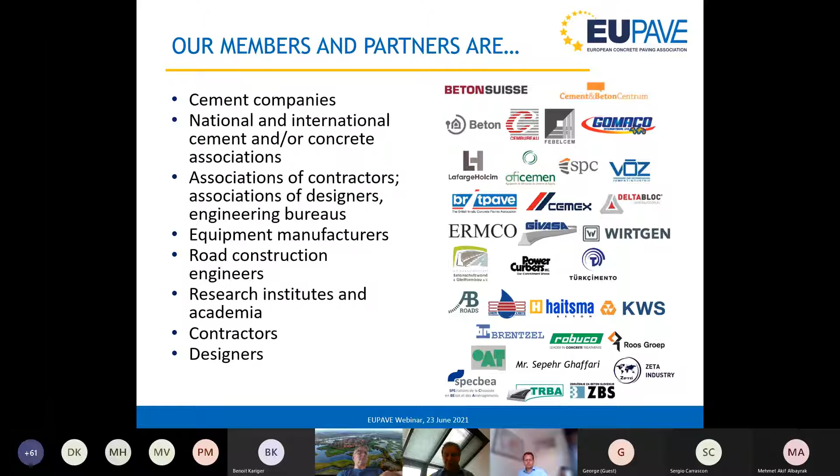We have full members and associate members, and partners, ranging from large cement holdings, international and national cement and concrete associations, to equipment manufacturers and contractors, and even small businesses, designers, and consultants. So all ranges of companies are represented in EUPAVE.

The work we do is summarized here by showing our 6 working groups: best practices working group for exchange of know-how, environmental strategy to talk about the environmental benefits of concrete, the advocacy working group mostly at the EU level, concrete safety barriers, and statistics and communication tools.

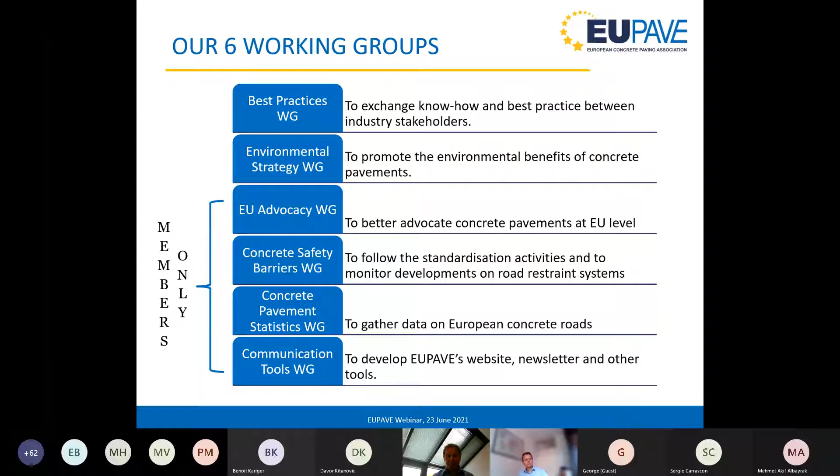Everyone who is interested in supporting the concrete pavement sector, or in getting support to help develop and build concrete pavements, is always welcome to join us as a member or a partner.

Let's come now to the agenda of today. We have a webinar with the title Towards a Low Carbon and Circular Concrete.

It was an initiative of our working group on best practices. However, it is very closely related also to our working groups of environmental strategy and advocacy, because the themes we will be discussing are really the themes of the European Green Deal. First of all, the CO2 reduction or carbon neutrality.

As most of you know, all national cement associations and international cement holdings are developing pathways to 2030 and 2050 carbon neutrality. So it is a very topical theme now. But also the circular economy, the use of recycled aggregates and other recycled materials, is also very important. Circularity is also part of the Green Deal.

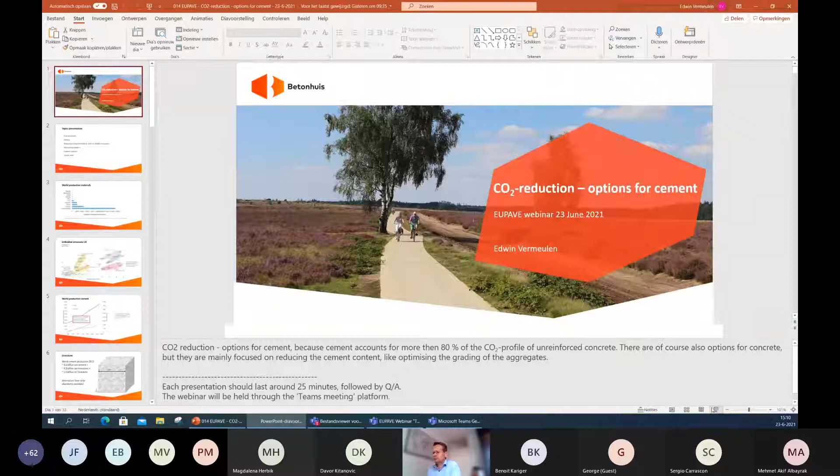I'm going to talk about options for cement for CO2 reduction, because cement is responsible for 80%, or over 80%, of the CO2 profile of unreinforced concrete. And of course, if we want to reach net zero carbon in 2050, we also need to address concrete itself, and of course the design of buildings, etc. But cement plays a very important part in this.

I'm going to try to explain why it's so difficult to find alternatives for Portland cement clinker, which is the main component of cement. But to do this, I have to start with the raw materials and a bit of history of the development of Portland cement clinker. I think that's really necessary to understand the research on alternative binders.

And in the second part, I will discuss alternatives, but also carbon capture and what we can do now to reduce the CO2 profile in the short term.

Here you see the world production of materials. The largest amount is cementitious material, which is mainly concrete, but also mortar and plaster. Compared to other materials, it's really a lot. We produce more concrete than all other materials combined. So if we are going to look at alternatives for cement or concrete, we have to keep this in mind. We need really a lot of material.

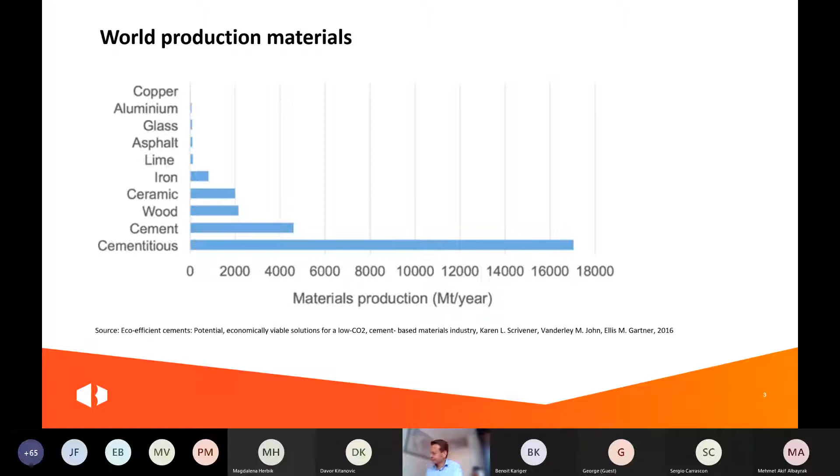We always heard that concrete is responsible for 7 or 8% of the man-made CO2 emissions worldwide. But that is clearly not due to the CO2 profile of concrete, but it has all to do with this enormous volume of concrete we produce.

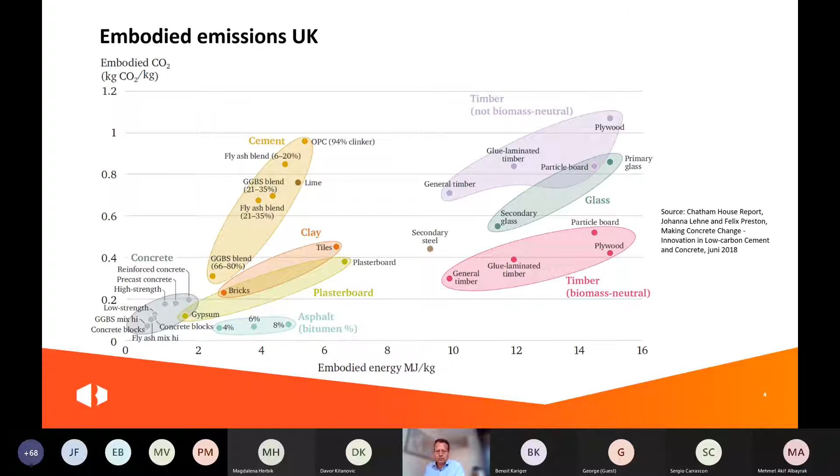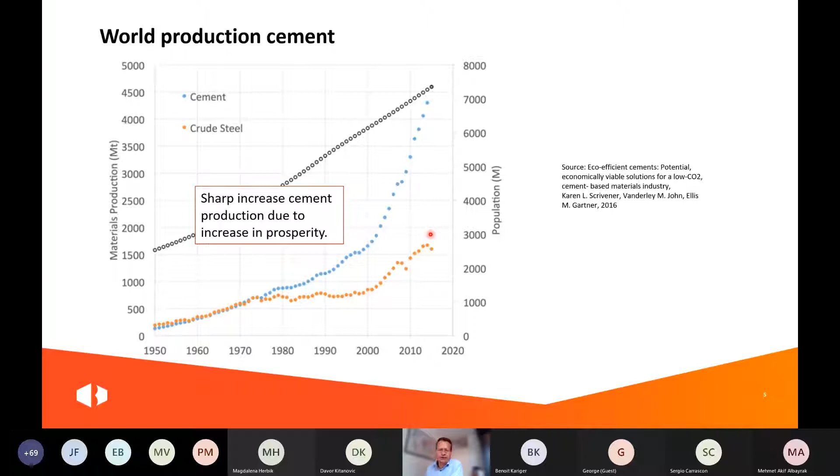And here you see the increase in cement, which started around 1975 to increase strongly, and especially after 2000. That was mainly in China, but also in other countries, due to the increase in prosperity. Once a society develops, people want to shift from wooden to concrete buildings, and need infrastructure, sewers, and things like that. So that explains the strong increase in demand for concrete.

So if we search for alternatives for cement, it's clear we need a lot of alternative material as well. And for concrete, we need 6 times as much as this for the aggregates. So alternatives have to be abundantly available to consider them.

Now, of course, we cannot use critical raw materials. Critical raw materials are not necessarily scarce, but if they're not scarce, they're only available in a few countries. This was actually the main reason behind the circularity movement in Europe. In Europe, we noticed that we were, for a lot of materials, dependent on countries like China. And that was the main reason to start focusing on recycling of those critical materials.

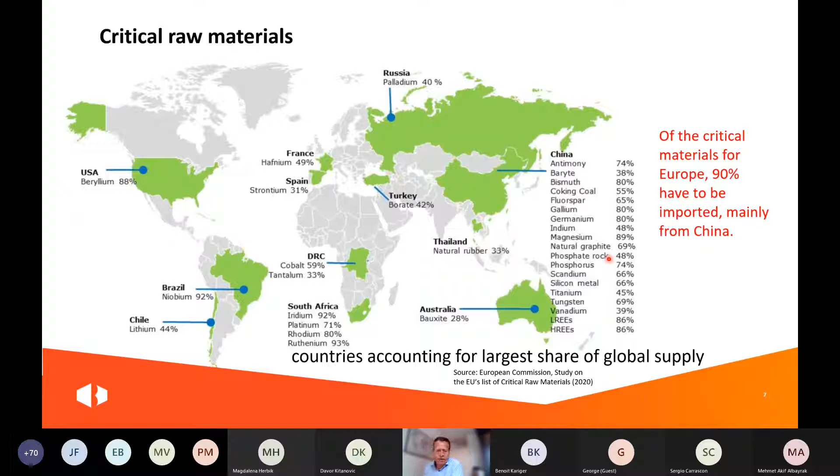Also for iron, iron is moderately scarce, 300 years available. But we need iron for cement production. Here we use clay. We need iron only in a very small amount, and it's sufficiently available normally in regular clay. And that's also the case for aluminium. We also need aluminium, but in small quantities available in clay. And clay itself is also, like limestone, abundantly available.

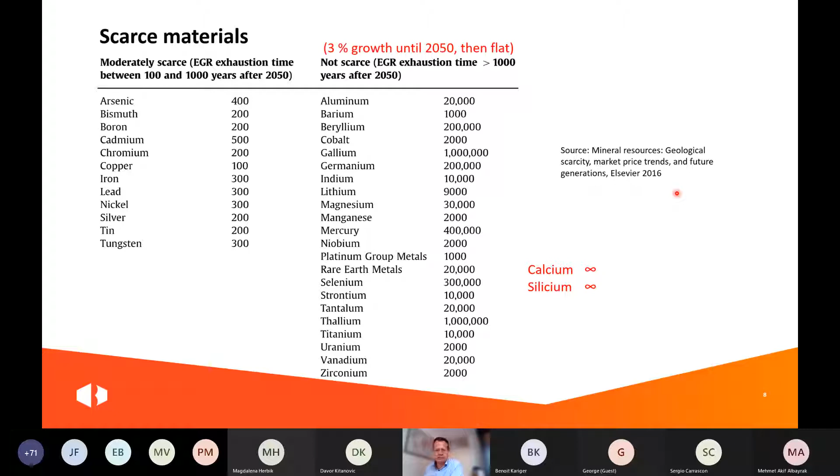Raw materials for cement are unlimited and regionally available. Interestingly, limestone is produced every year in larger quantities than we use for cement production. Limestone is basically skeletons of plankton, and in the oceans about 5 billion tons are produced every year, which is more than we need for limestone production. Of course, we cannot use this in LCAs because it is on the same time scale, but not in the same place.

Nevertheless, if we are able as a society to quit using fossil fuels, then the CO2 in the atmosphere would go down despite calcining limestone.

Now I would like to switch over to a bit of history.

Of course, people like to live in stone houses. We started in tents and caves and probably also wooden buildings, but soon moved to adobe, which is dried, sun-dried clay. That started around 8000 BC, and it's still in use in Africa and South America. You will see buildings still built in adobe, and it is also very environmentally friendly, labor intensive, but environmentally friendly. But of course, not really an alternative for concrete. Those buildings last only a few decades, need much maintenance. They are not very resistant to rain, so especially not suitable in our environment, and not very strong. You cannot go higher than what you see here.

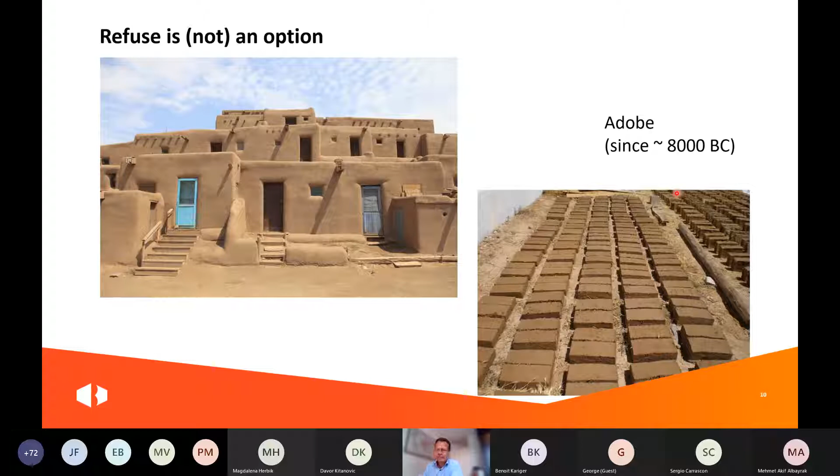Then around 4000 BC, lime was invented, probably by the Egyptians, but you will also find other possibilities. This was, of course, a huge step forward. Lime itself is quite a circular product, as you can see here. You start with limestone, found in nature. You burn it at 1000 degrees. Then you get burnt lime, and you combine it with water. The slaked lime you can use to make a mortar with sand and start building, or coat the adobe, as also happened. So this was quite a step forward.

But of course it also has a disadvantage: it takes a lot of time to harden, and it's of course not as strong as pure Portland cement. If you start building walls with lime, they have to be really thick, because the CO2 has to ingress into this mortar, and it really takes a lot of time.

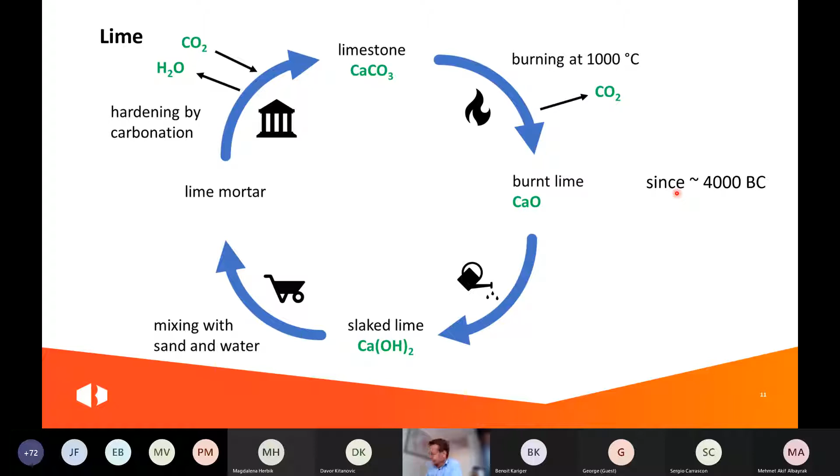The Romans improved this lime by adding a pozzolan. This pozzolan could be ash of volcanoes found in the neighborhood, in Pozzuoli around Vesuvius. But they could also use ground tiles as a pozzolan. This pozzolan takes the lime from the burnt lime and reacts with it to form CSH gel, which is the main component also in modern cement stone.

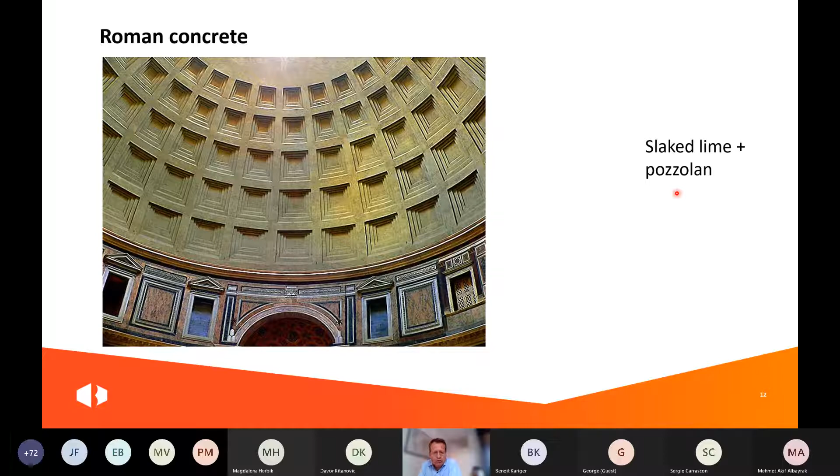Hydraulic lime was actually invented after 1800. It is lime combined with clay, or in the past you could say dirty lime. But if you combine it with clay, then you get a first component we have in modern cement.

Now here you can find the figure of producing modern Portland cement, but you will also find the steps from the past. Here you have the limestone, and in modern cement here we have a part of clay. But in the past, this was used for producing lime mortars. Later, with hydraulic lime, clay was added and a higher burning temperature allowed us to produce the component C2S, the belite. In modern Portland cement, we go a bit higher in temperature, and we are able to produce the main component of modern Portland cement, which is C3S, the alite.

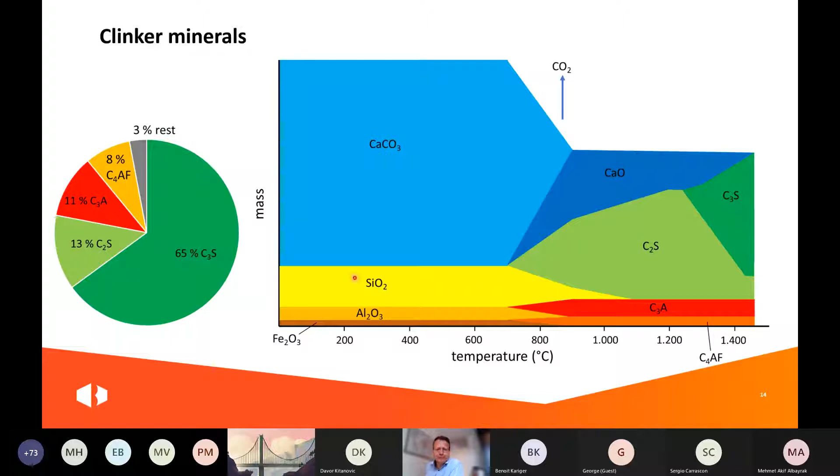Here we have the roadmap for CO2 reduction. You see that a large part has to come from carbon capture and storage or carbon capture and usage, and only a small part is expected to come from alternative clinker.

We expect to get 117 kilograms CO2 per ton reduction from cement itself, of which 72 from clinker substitution. That includes alternative binders, but also replacement by slag, fly ash, limestone, burnt clay and other alternatives. So it's already clear that it will be difficult to find alternatives for regular Portland cement clinker.

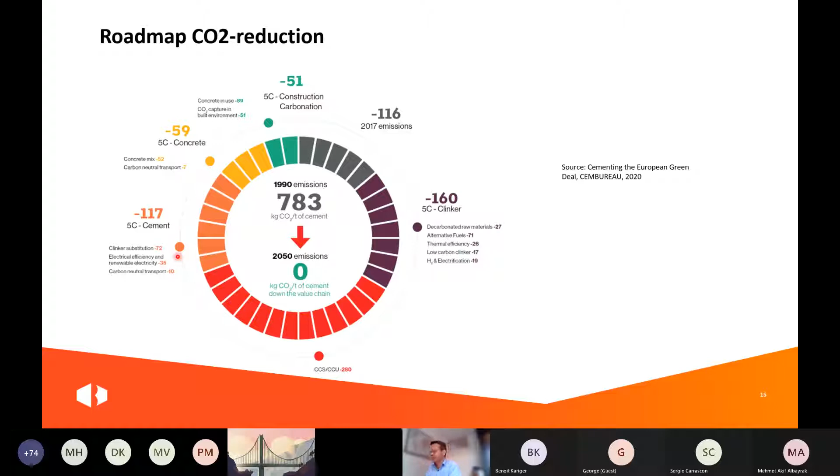The simple step is to substitute clinker by alternatives. That's already being done on a large scale. For example, most of the slag produced worldwide as a byproduct of pig iron production is already used as a component in cement or directly in concrete.

Fly ash is not fully used because not all of it is suitable, but of course fly ash will be phased out because we're going to end with coal power plants.

But what we can have in the future as well is, of course, filler. This is limestone, which we can produce without any limit, and we can calcine clay, though clay has limited availability.

That's not currently done much because we still have sufficient slag available, although it's only about 8% of total cement production. But you will see that in the future more and more calcined clay will be used to reduce the clinker content in cement.

Now, if we're going to look at alternatives for Portland cement clinker, like I said before, we have to look at the availability of the raw materials. We cannot use, for example, phosphorus, due to the fact that it's insufficiently available.

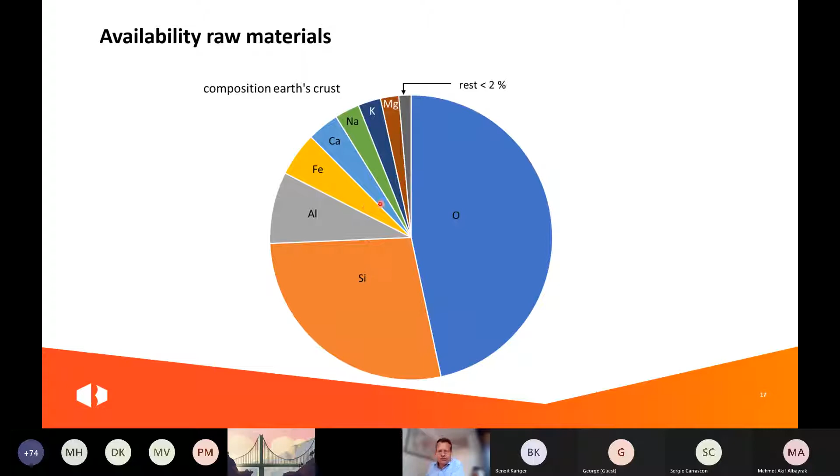And if you look for an alternative, you should look at those elements to find an alternative to make sure that they are available. But that's not the only restriction.

Of course, it must also be chemically possible. Cement particles have to be able to dissolve in water. The reaction products must have a larger volume than where you started with, otherwise you won't build up any strength, and the resulting products must be poorly soluble in water. If you look at those restrictions, both the availability of materials and the chemical possibilities, then you end up with three products: calcium silicates, calcium aluminates, and calcium sulfoaluminates.

That's basically what we have as possibilities. Of course, I say here hydraulic cements, meaning reaction with water. The alternative reaction is a reaction with CO2, which is one of the examples I will come back to later on.

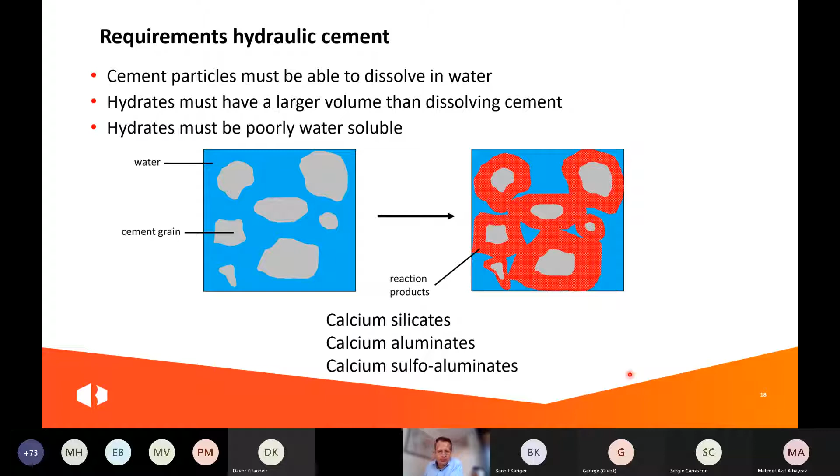Now, a more serious alternative is belite calcium sulfoaluminate cement. That's also belite, but the reaction is sped up. The slow reaction of belite is sped up by adding yeelimite, which is a combination of calcium, aluminium and sulfate. This forms ettringite, and that helps to speed up the hydration of the belite.

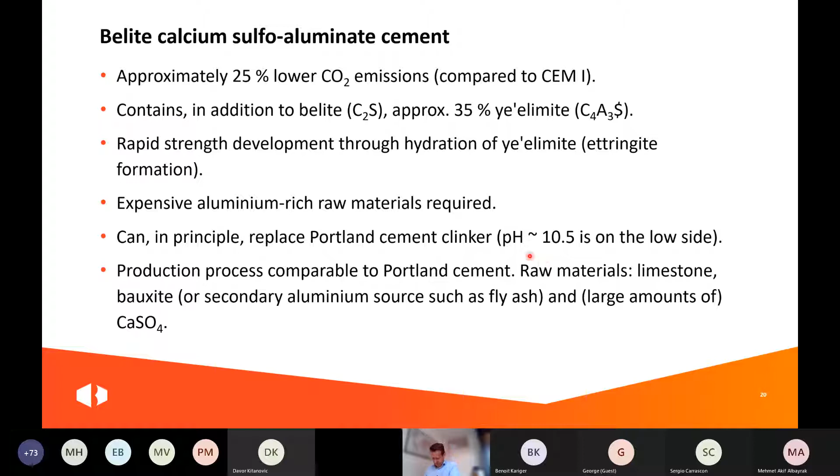Solidia cement is another interesting alternative. It's a product of LafargeHolcim. It's basically wollastonite. Wollastonite is calcium silicate, so CS instead of C3S, and it has to react with CO2. That limits the sizes of the products, so you cannot process it like regular concrete. You have to produce relatively small products and then store them for 24 hours in a CO2 chamber in order to let it react. But then you have a very quick strength development, so it is interesting, especially for unreinforced applications.

So it reacts with CO2 instead of water. Interestingly, you use the same raw materials and the same furnace as we have now. So it should be relatively easy to produce this product, but a bit difficult to process it into concrete. But the CO2 savings are quite high. You have 30% during production, mainly because you use much less calcium than with regular Portland cement, but you also have the CO2 absorption during hardening, so that makes it really interesting.

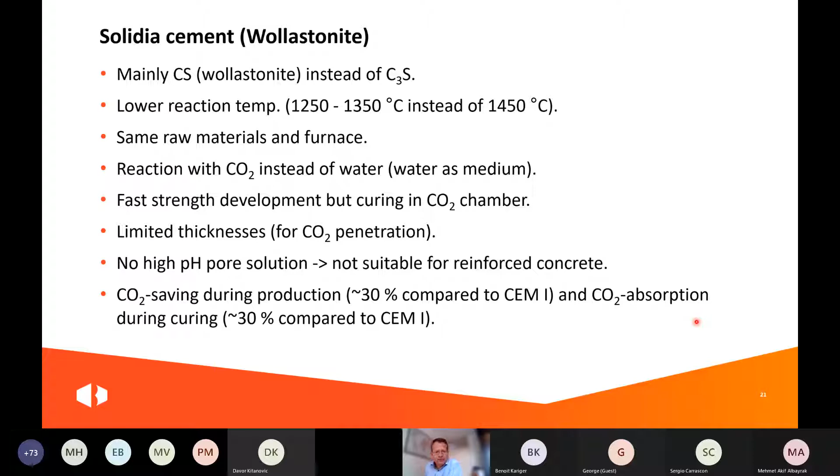Now here you have this process. You have the cement grain, the wollastonite, water as a medium, and then the CO2. And here you have the reaction product, and here you can say the microstructure of Solidia cement: remains of the cement grain, silica gel, embedded in calcium carbonate.

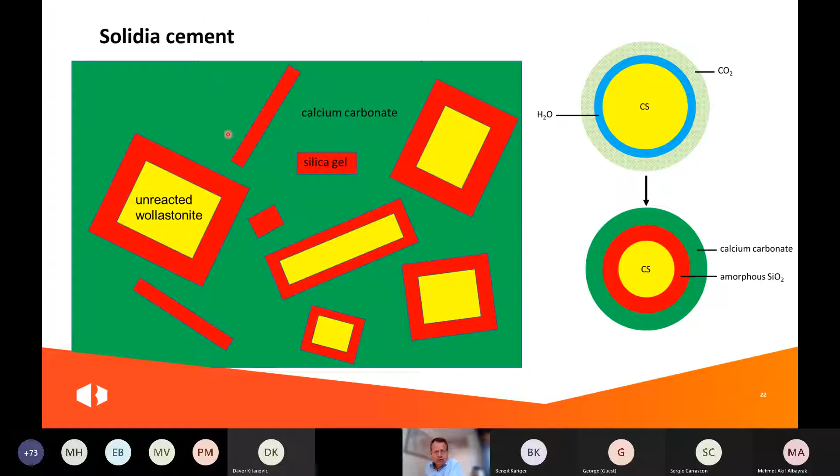Now another interesting alternative is Celitement, which is a product — I must say, Solidia is the industrial part, Celitement is still in the laboratory phase, but an interesting development. This picture looks a little bit complicated without any chemical background, but the main thing is that here you produce Portland cement with 3 parts of limestone, calcium carbonate; the green is the CO2, which is released when burning the limestone. And if you produce this cement, you only use 1 part of calcium carbonate, so you have much less CO2 in the air.

But the process of this cement is quite complicated. You need an autoclave, and then you have to grind it again. That looks simple, but in practice this is a complicated process to get it stable and to make it on a large scale.

The end products are of course also different. We have the CSH gel after reaction with water, that's in both cases, but with pure Portland cement you get 2 of those calcium hydroxide units which you need for the high pH, and here with this cement you don't have those calcium hydroxide units, so you end up with a low pH. You can process it like regular cement in concrete, so that's really an advantage compared with Solidia. But the low pH and the complexity of the process, that makes it difficult.

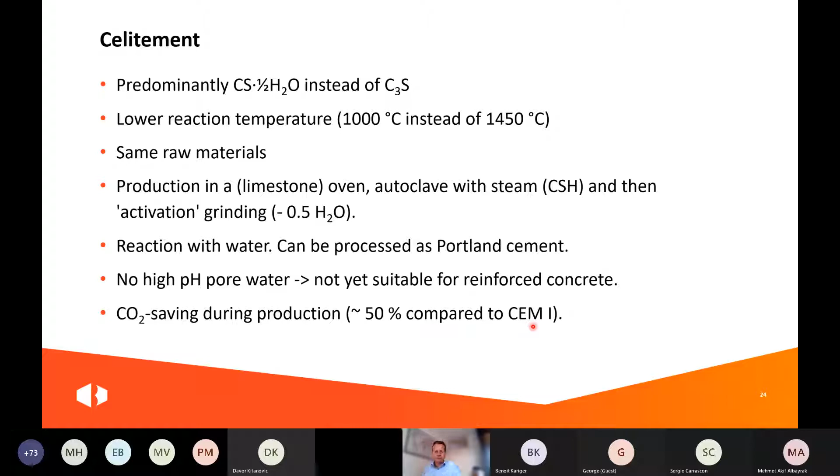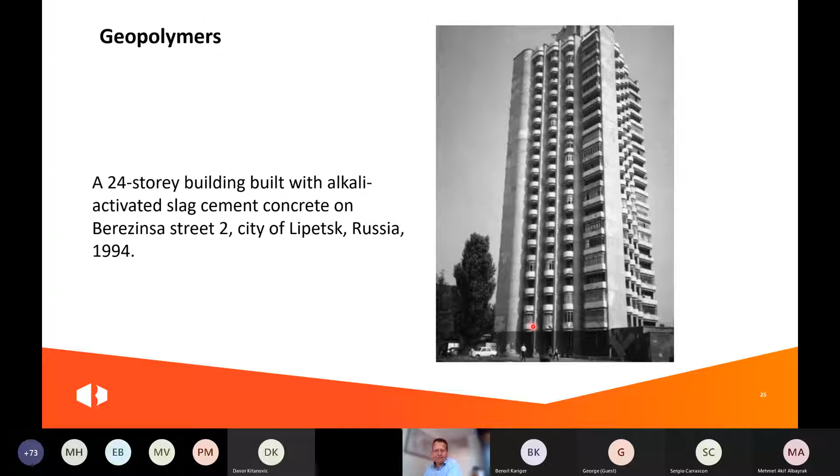Then we have the geopolymers. Clearly you can build with geopolymers, like you see in this example, although the examples are still limited. If you go to a webinar about geopolymers, you have about 50% chance you're going to see this picture. And if you ask the lecturer, have you been there yourself, the answer is mostly no. So they didn't check, me neither. I haven't been there, but I checked on Google Maps. It's still there. I don't know whether this is scaling or not. Maybe not — maybe it's a coating that has been lost. But clearly, you can build with geopolymers.

But whether it's suitable for road construction, that remains to be seen. Here you have 2 examples of geopolymers used recently in bicycle paths, cycle paths in the Netherlands. After only 1 week of snow and frost, they were heavily damaged by scaling.

I would say much more damage than you will find with regular Portland cement based cycle paths. I must say there are also good examples, for example, a roundabout in the Netherlands made from geopolymers, which is still looking very fine after 3 years. But I would say more than 50% is substantially damaged.

Probably because it's not really a geopolymer with cross-linking between silicon and aluminium atoms, but it's mainly alkali activated slag, and then you still have a calcium silicate hydrate, so CSH gel, but without a calcium buffer. And so I expect that the carbonation causes this damage. The carbonation, like with blast furnace slag cement with a high slag content, results in the formation of a porous silica gel.

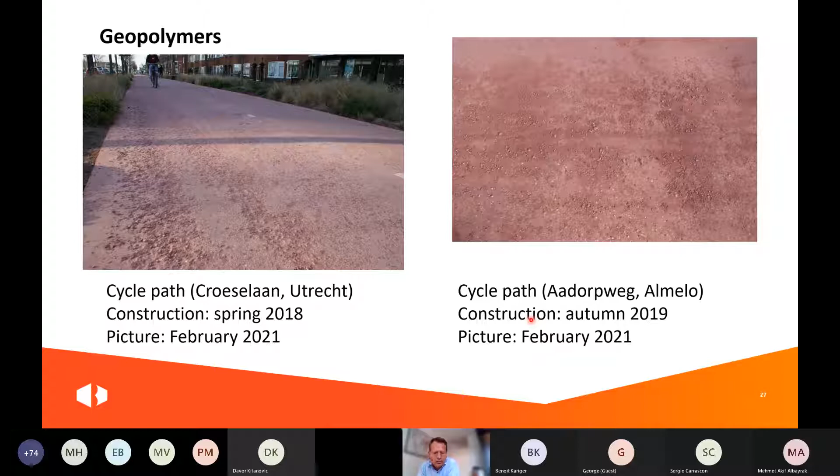So geopolymers were already used in the 1950s. But important, if you use slag and fly ash that are already used in concrete or in cement, then you don't have any environmental benefit, but only a replacement of the use. And actually you have an environmental loss because you have the additional activators you have to use, with a high CO2 profile. So if you want to have an environmental benefit, you need additional sources of materials that are not currently used in concrete, like calcined clay or perhaps fly ashes that are not suitable for regular concrete.

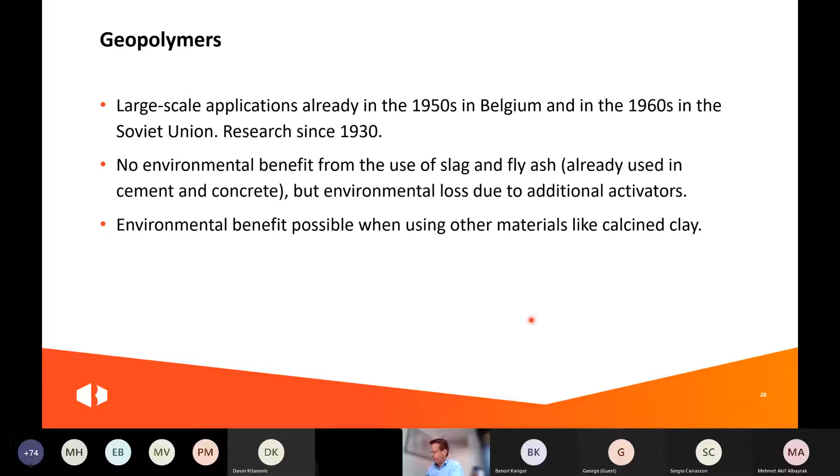Carbon capture. I explained how difficult it is to develop alternative binders based on availability and based on the chemistry. So that's why we also need carbon capture to reduce the CO2 profile of concrete and to reach net zero in 2050. Now, the main idea about carbon capture is, of course, to concentrate the CO2 in the process. Otherwise, it would be way too expensive. And here are a few examples how to do that.

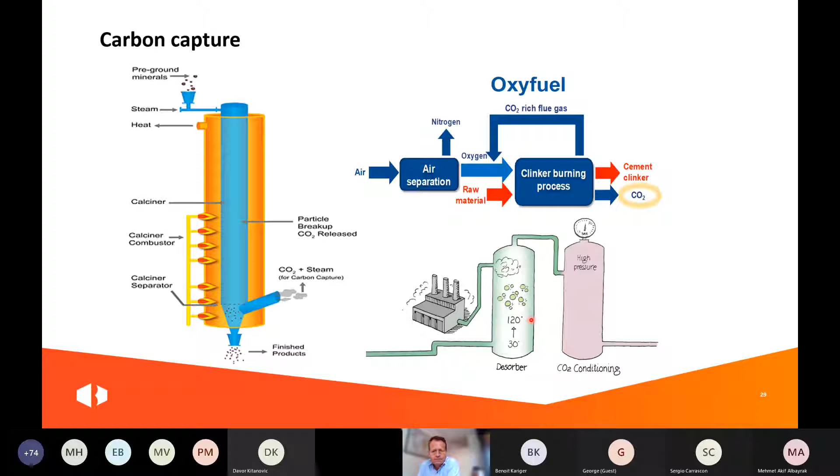Then of course, what are you going to do with the CO2? Well, there is sufficient capacity for storage in nearby empty gas fields for hundreds of years, actually, not only for the cement industry, but for all large emitters. But of course, we want to end up with the use of CO2 to produce ethanol or polymers or algae, that's already tried, but also to activate recycled hardened concrete.

If you use the smart crusher, you will end up with cement stone, and if you grind it and activate it with CO2, you will have a product, more or less a pozzolan, and you can use it again as a main component in cement.

So conclusions: if you look at the earth crust composition and chemistry, then yeah, it leads to Portland cement. So it was not by chance that we ended up with Portland cement, and there is no single alternative that can replace Portland cement clinker in terms of availability and quality. So we need a lot of different measures to reach a significant CO2 reduction.

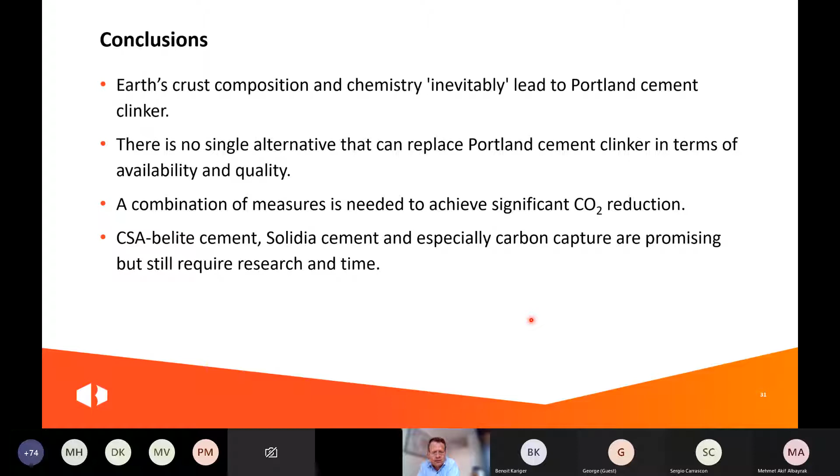And in my view, this calcium sulfoaluminate belite cement, the Solidia cement, but especially carbon capture, are promising to help reach this net CO2 target. But we need time, that's for sure, especially for carbon capture, despite already one plant being adapted on a large scale. It will need 10 years or more before we will see it on a larger scale. So that's unfortunately, the short-term availability to reduce CO2 is limited.

What we can do is, of course, use low clinker cements as far as possible. But don't go too low with your clinker content, because we need the frost resistance for our roads. Optimize grain packing - if you do it very well, I think that can save 20 to 30 kilograms of cement per cubic meter, or even more.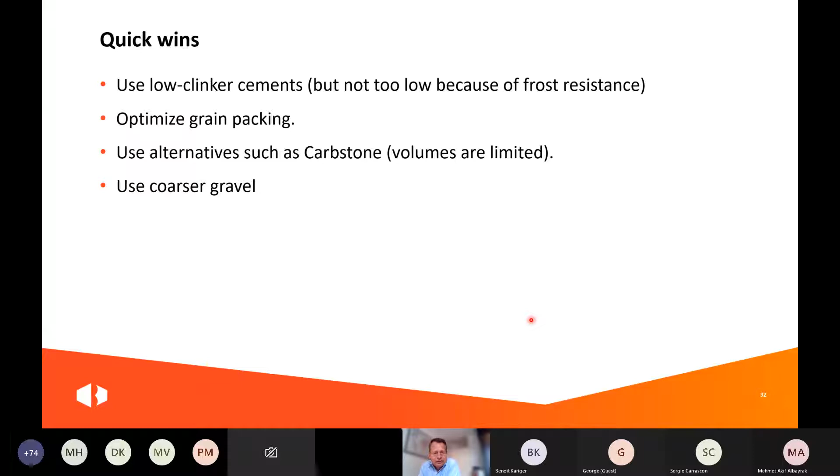Use alternatives as far as available, for example Carbstone, although of course the volumes of those alternatives are limited. And use coarser gravel whenever possible - the coarser the gravel, the less cement you need.

That's the end of my presentation. I will end sharing.

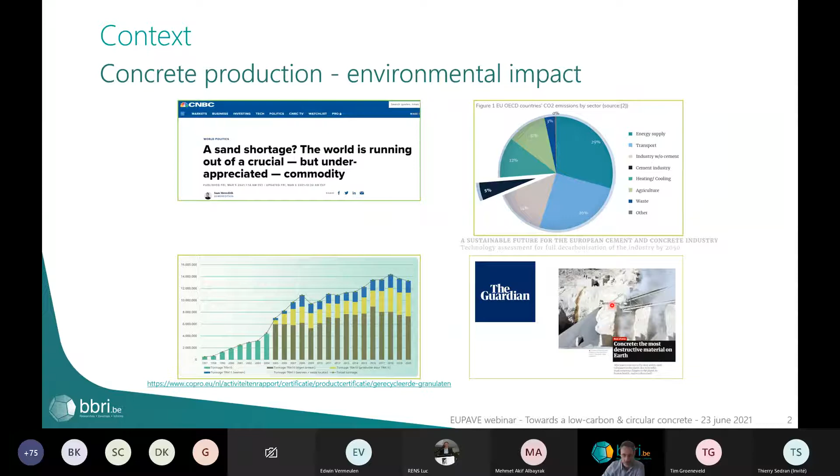To lower the environmental impact of concrete, a lot of developments have already occurred. A lot of firms are beginning to innovate and to search for alternatives for the cement, for the binders in the concrete, but also for the recycled aggregates, the natural aggregates.

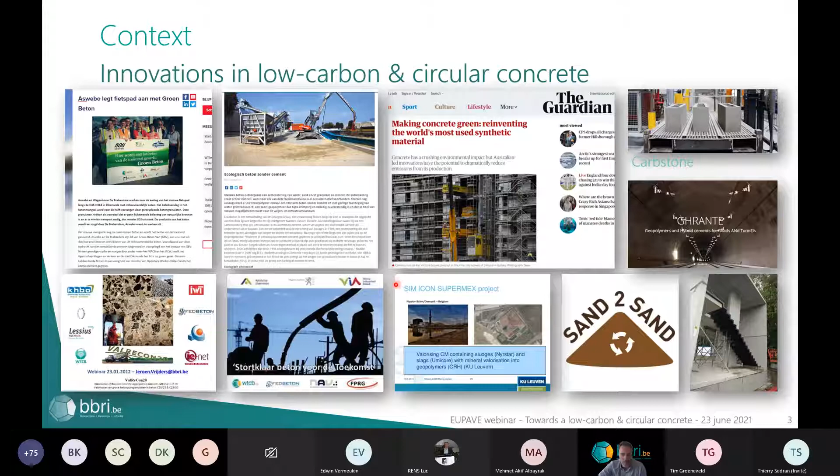So we, as BBRI, conducted a lot of research projects to improve the application and use of recycled aggregates, and to show that you can go further than we are already allowed to.

But of course there are a lot of innovations. We can see them; the companies come to us. They develop some things, and they are sure they can use their materials in concrete. But we have to acknowledge that a lot of those innovations don't make their way into practice. There is some kind of void between the researchers and the contractors, the designers that design buildings and structures, so not all of those innovations find their application in practical cases.

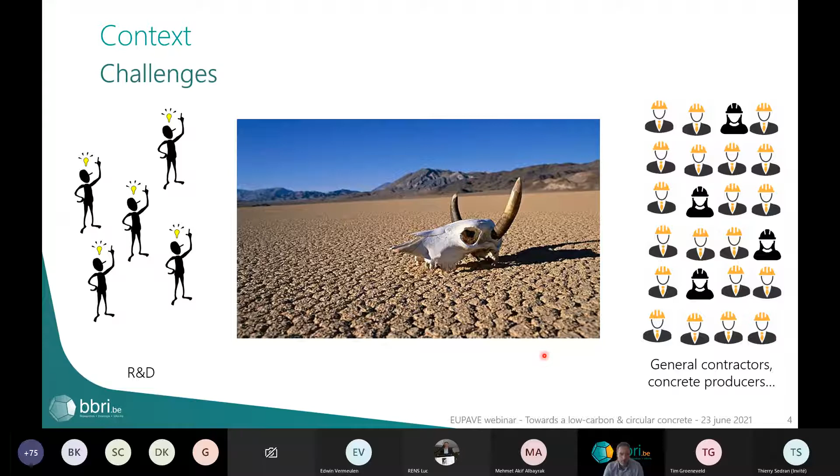So why is this? On the one hand, a lot of times the argument is raised that the technical framework to apply these innovations is not complete. It's too difficult, too complex to follow all the rules that are already in place.

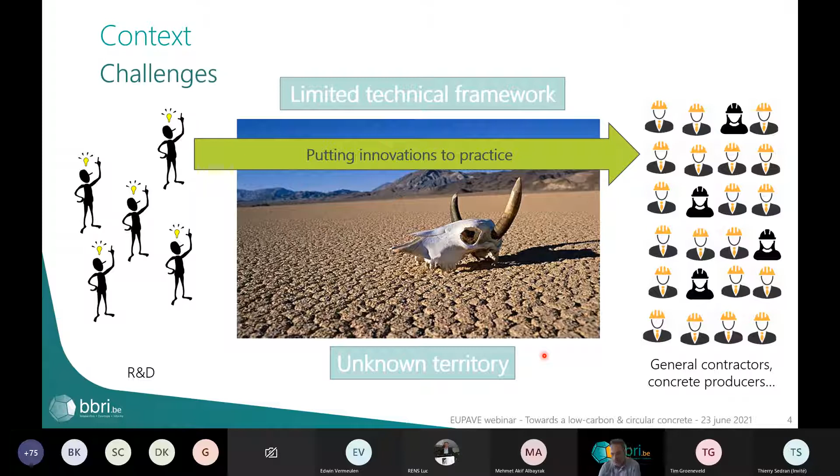On the other hand, it's unknown territory, and the construction industry by nature is very traditional. We have the rules, we have our way to work, and it's very difficult to do something else when something we know is already good, not taking into account the environmental impact, of course.

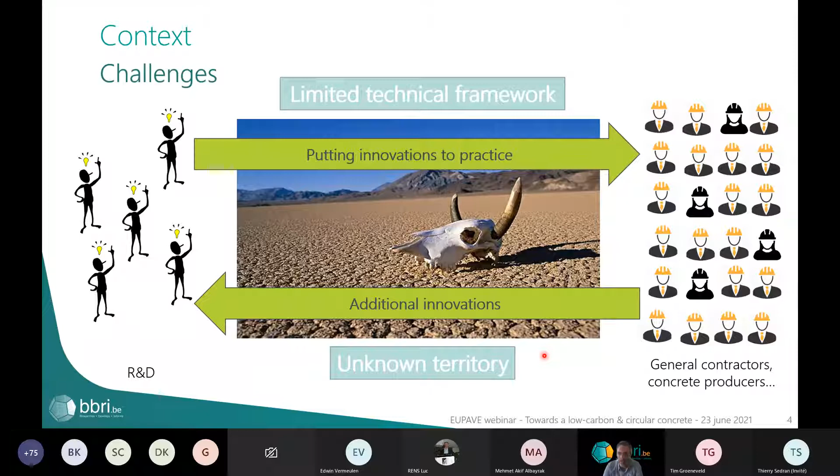Because of this, additional innovations also have difficulty developing further, because when there is no ground for application, why should they investigate further and innovate? So there are some difficulties getting these new technologies and innovations into practice.

That's why we at BBRI started a project in 2018 named Circular Concrete. It's a project funded by Flanders on the one hand, and on the other hand by 27 companies, innovators that produce and develop their products, and they want to see their products into practical cases. So what we did is a state-of-the-art review, a SWOT analysis of different technologies that are available.

These are technologies that improve the circularity of concrete. Some of these technologies we investigated further on a lab scale to see how far we can go, how interesting these innovations really are for Belgium anyway.

Then with BBRI, we supported some test cases. We did some research in the lab. We talked to different parties to get the technologies really into practice.

We also did an evaluation of the environmental impact of different solutions, which is not very easy to do because you have to take into account a lot of things in the LCA analysis. And we put all the results into different reports.

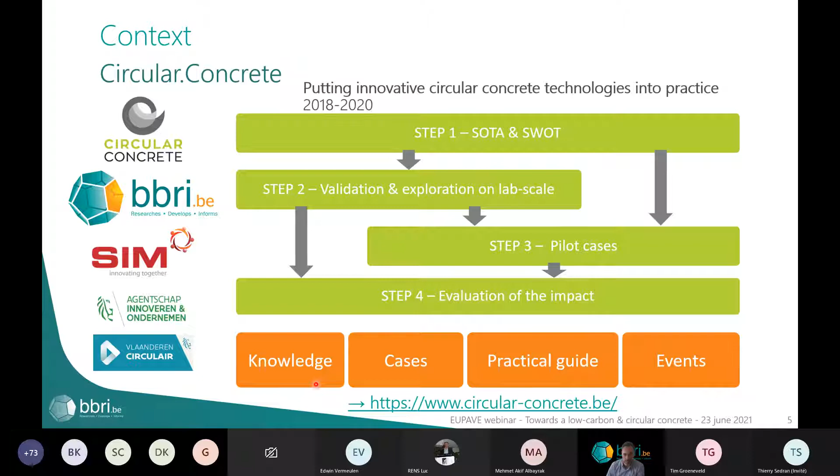In the project, we started with the state-of-the-art, and we looked at different aspects of concrete, for example the primary resources, aggregates, cement. Cement I'm not going to tackle in this presentation because Edwin already gave a very complete presentation of that.

But we can also look at the design, the mix design, the construction process to improve, the recycling process, the reuse, demolition of concrete structures. There are innovations that look at that, and then of course there is also the valorization of secondary materials, slags, recycled aggregates to be used in concrete.

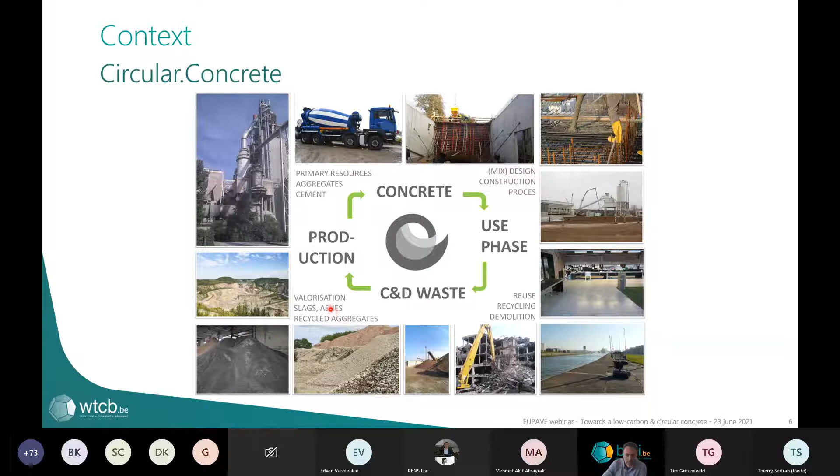So in the state-of-the-art, which is also available on the website in Dutch at the moment, we looked at the different technologies available at the moment regarding concrete composition. So the binders I'm not going to tackle today.

I'm going to talk about the aggregates. The design and building process we also tackled in the report, and different innovations were discussed, but I'm not going into it here. And then also the use during the use phase, you just prevent that constructions are being demolished.

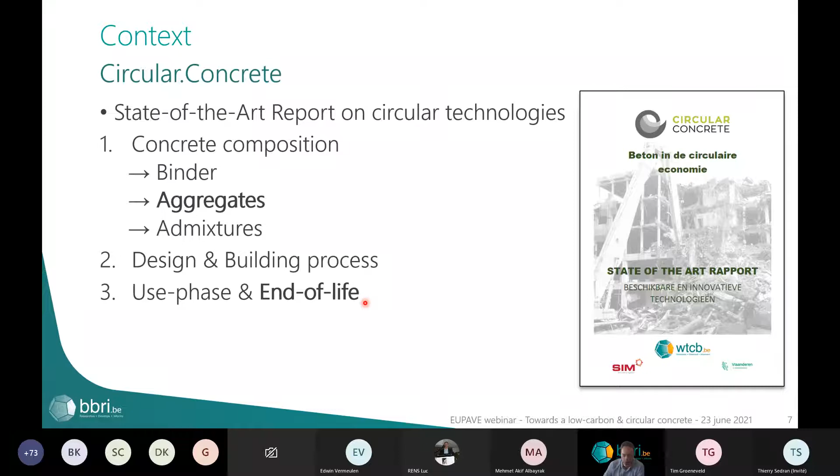So lengthening the lifespan of structures falls into that category, and also end of life. So how can we improve the recycled aggregates coming from the demolition of concrete structures? How can we improve the use of these materials?

So when we look at the concrete composition and the aggregates, around 70 to 75% of the volume is taken up by the inert materials. So we have the fine aggregates, the sand, and we have the coarse aggregates. And then there is the binder, the water, some air, some supplementary cementitious materials, and then admixtures.

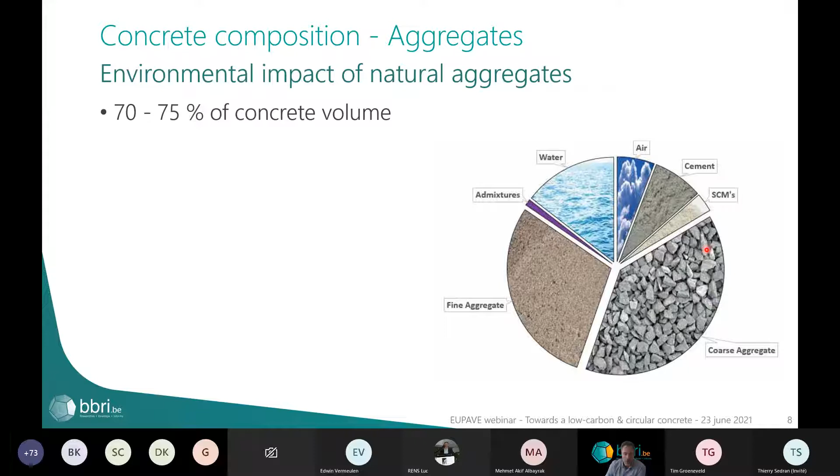But you can see that of that enormous volume of concrete that is produced, three quarters are coming from aggregates, from inert materials. And here we can see how many tons of aggregates we need approximately to build the structures we are used to using in everyday life.

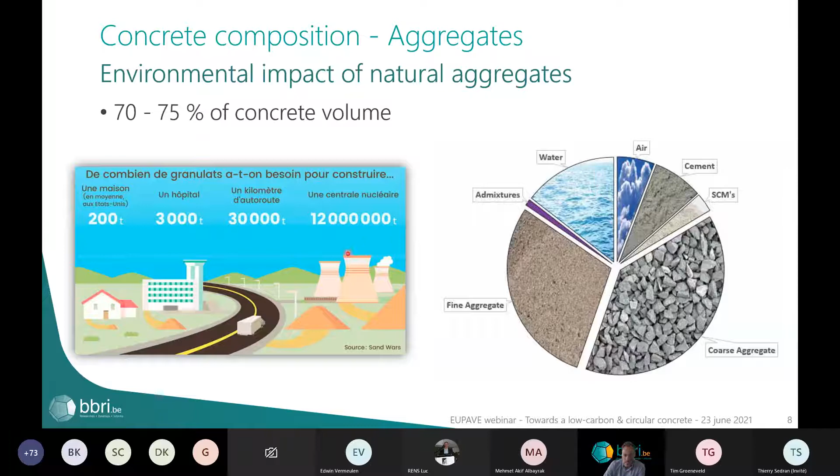You can see here 30,000 tons of aggregates necessary to build 1 kilometer of roads, a nuclear plant, 12 million tons of aggregates needed to produce all the concrete that is needed here. So enormous volumes. All of these aggregates have to be mined somewhere.

They have to be quarried, mostly from the quarries, of course. You can also get the aggregates from riverbeds and from the sea, but those from the riverbeds are being more and more depleted, so we cannot use the quantities we need for concrete anymore. And the aggregates coming from the sea, the coarse aggregates, cannot really be used as such into concrete. They are not of high enough quality, the form is not good for concrete. So we're mainly looking at the quarries for the coarse aggregates.

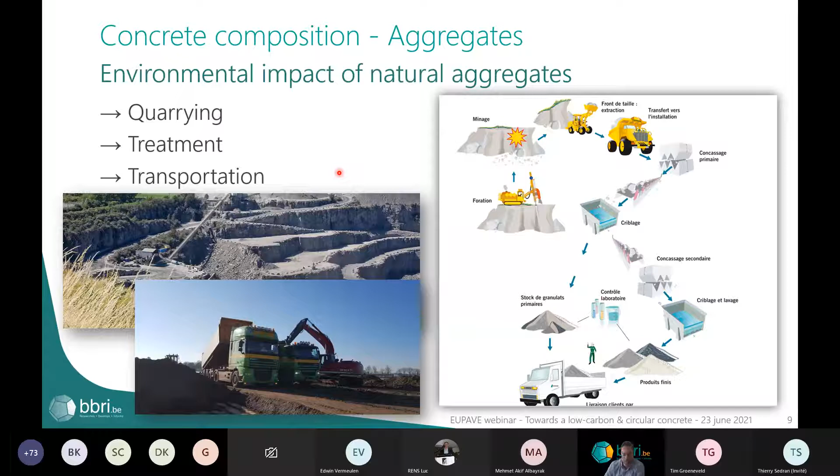And so all these aggregates have to be quarried, treated, washed, broken, and then transported to the concrete plants for concrete production. So that's a lot of activity to produce those aggregates.

Now we can improve the impact by replacing some of these natural sources, natural materials, by materials we get from the construction debris. That way, when we reuse them locally, we win in the quantity of aggregates that need to be quarried, and we also limit the quantity of debris that has to be put elsewhere. So out of this debris, we can get recycled concrete aggregates and recycled mixed aggregates. The gains there, like I said, are less consumption of natural resources and less transportation.

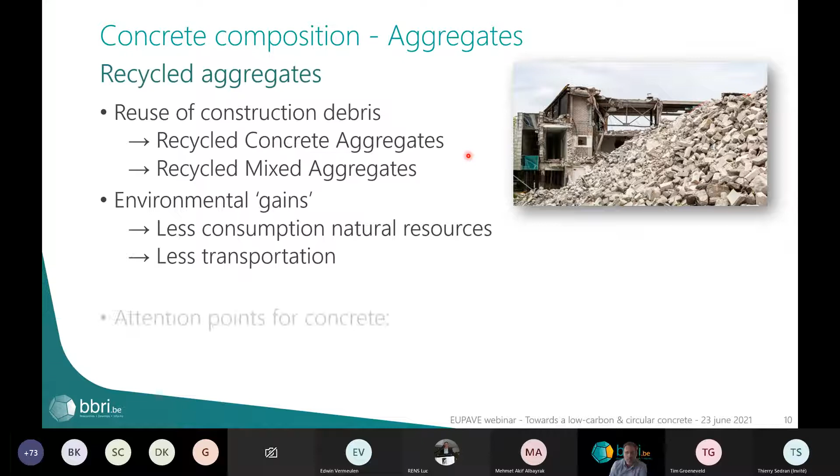Of course, we cannot put them into concrete as such without taking into account anything. We have to look at the water management, which is very important.

When we look at recycled concrete aggregates, schematically here on the right, you can see one of those aggregates. In fact, it is composed of the original rock aggregates from the primary concrete, and it is surrounded by cement paste. So instead of the original rock aggregate, you get a material that is composed of the original rock aggregates and a mortar.

So of course, this recycled concrete aggregate is going to absorb more water. The cement paste is porous, more porous than the original rock aggregate, so it's going to absorb a lot of water. So in the concrete mix, you have to take into account the high water absorption of these aggregates. You have to add a little more water to the mix, but you have to make sure that this water is absorbed and does not remain in the cement paste, because it's going to lead to a higher water to cement ratio and less quality concrete.

Another thing to look at is the continuity and the purity of these materials. Of course, this is not a continuous source of material. This comes from the debris, from roads, from buildings, so the quality is not constant. And so you have to make sure that when you make concrete with these materials, the quality is uniform, and so the quality of the concrete is under control.

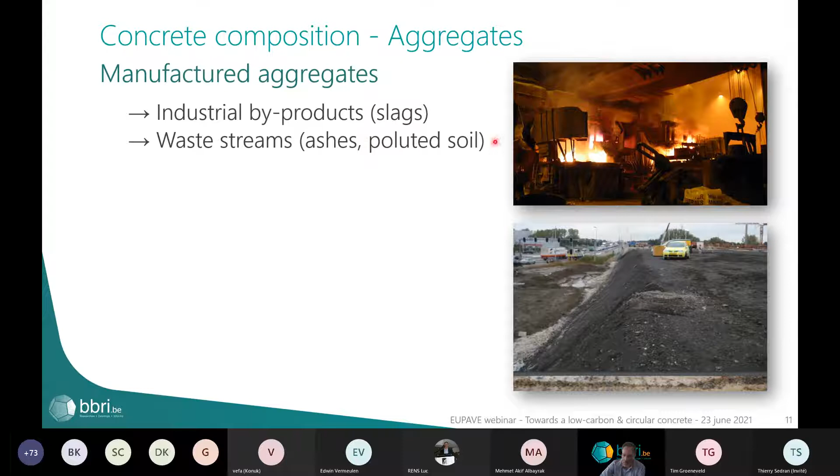You can also look at the waste streams from other industries, ashes coming from incineration plants, polluted soil that is being washed and cleaned and can be reused into concrete as an inert material. The gains there are, like the recycled aggregates, less consumption of natural resources, less transportation when we work and treat these aggregates locally. And of course also less waste, because these products, especially the waste streams, are otherwise dumped and used in a very low quality setting.

The attentions with these products when we're using them in concrete is also the continuity and the purity of these materials. You can consider that ashes coming from incineration ovens will not be very continuous; the composition depends on the primary product that you're incinerating, and the same thing with polluted soil. So it can be very variable in composition.

Also, the chemical reactions. Sometimes these waste streams and slags contain certain elements that, in alkaline environments with water, can react chemically and rise in volume, for example, or cause other reactions that are not very good for concrete.

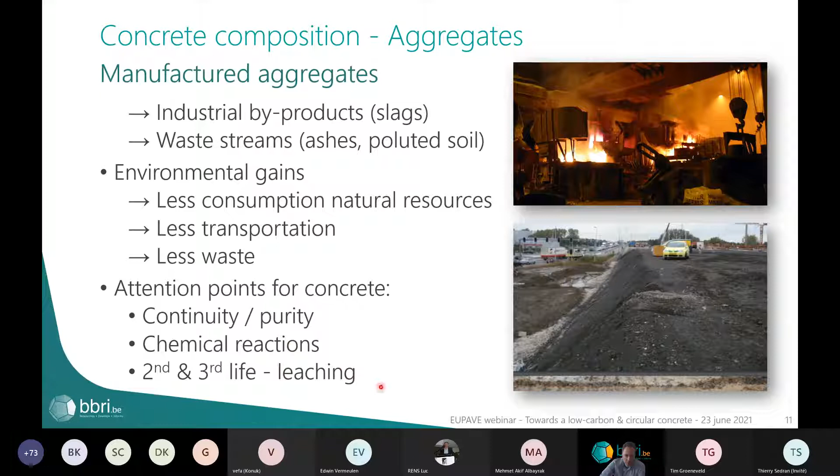And then there is also, of course, the second and third life, the leaching of these materials. We're talking about slags, metals, incineration waste streams that sometimes contain pollutants or heavy metals. They can be okay when we use them in concrete, but afterwards, when the concrete is broken into small parts and put somewhere else, at that time perhaps it can leach into the soil and cause pollution. So those are the main attention points when we're going to use these aggregates in concrete.

Now, the current standard for concrete—I'm not going to talk about road concrete, because I'm not specialized in that, and I know the design rules and application rules are slightly different than the ones for cast-in-place concrete as described in the standard EN 206.

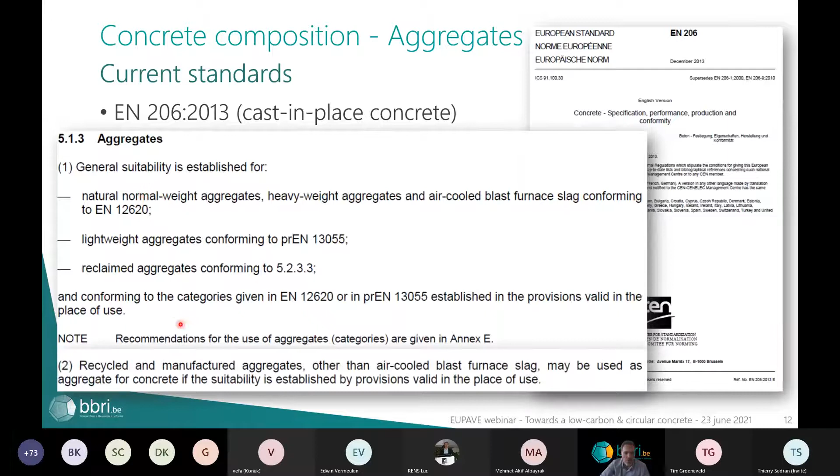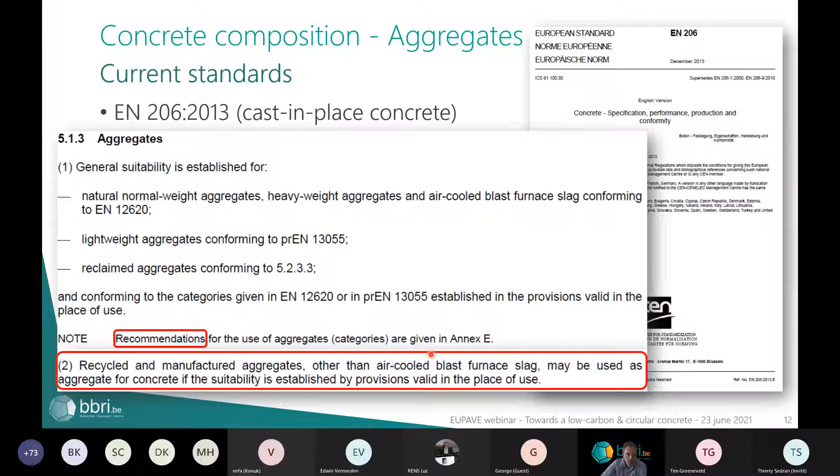But in EN 206, the standard already allows the use of recycled and manufactured aggregates, but in fact it says these are only recommendations—it's not normative, it's only informative. It says you can use them, but the suitability has to be established by the provisions valid in the place of use. So the national annexes of the 206 have to individually allow or describe what is possible to do with these aggregates.

When we look at Annex E in EN 206, it's an informative annex that describes how to use regular aggregates, but also recycled aggregates. There we can see that there are some rules for the aggregates themselves to be used. Type A is the concrete recycled aggregates, and type B is the mixed aggregates. So there are some demands regarding the composition of these aggregates, and then also the percentage in which we can replace the natural coarse aggregates. You can see we also only speak about the coarse aggregates.

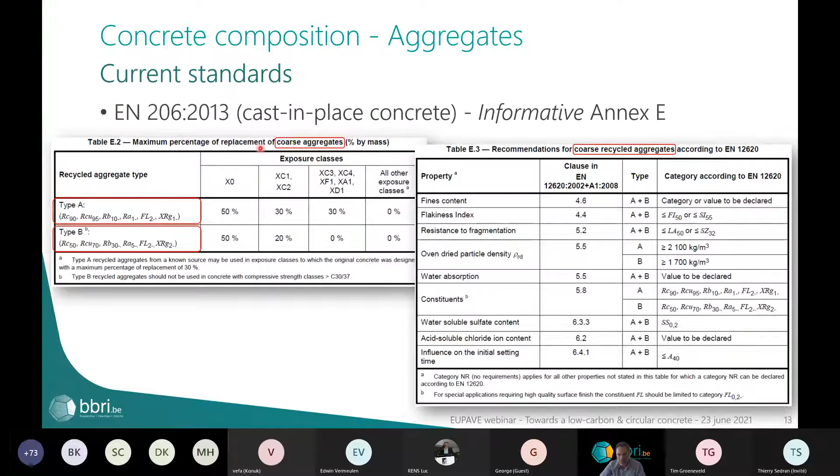The standards don't speak about the fine aggregates, the sand in the concrete. Now, I can only speak for Belgium, of course, because I'm not specialized in other countries.

So the general suitability is established, but we cannot put these aggregates into the concrete however we want. It is limited to strength class C30/37, and also the replacement percentage of the coarse aggregates is limited to some very specific percentages. So in fact you can use them, but the application is still very limited.

But there are already concrete plants that can deliver concrete following the standard very closely with recycled aggregates. Also for the B aggregates, the mixed aggregates, the standard already gives guidelines on how to use them in concrete.

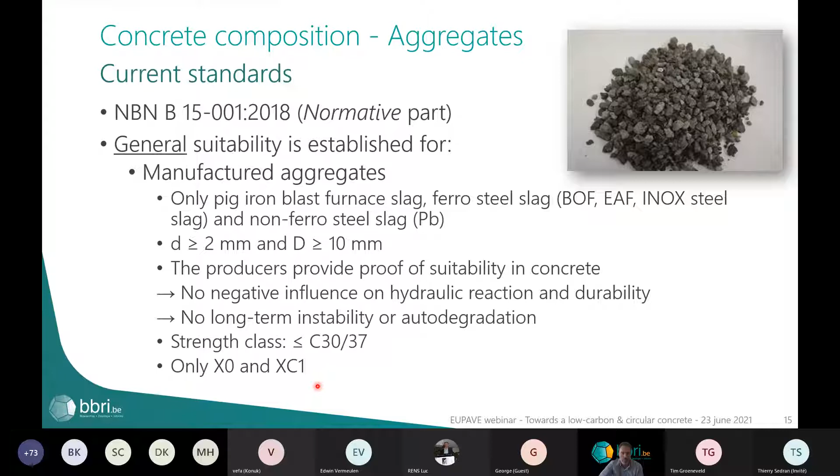You can only go up to XC1, which is a very limited field of application for these aggregates. So it's already possible to do this. However, of course, it only becomes interesting from an environmental standpoint if you can go higher than what the standard is already allowing. So you can do that.

The standard says that if you want to go higher in replacement percentages, higher in the application, so the strength classes and the exposure classes, when you want to use other fractions or other types of manufactured aggregates, you can do it, but you have to establish the general and/or specific suitability.

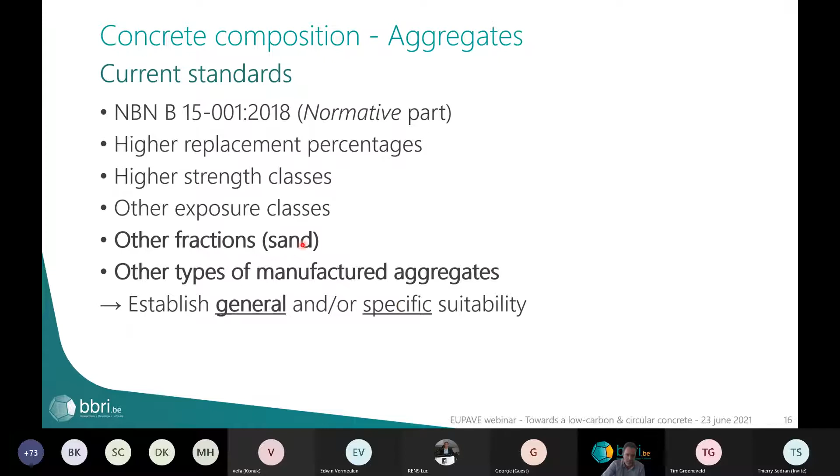For some of the aggregates already described in the standard, the general suitability does not have to be established, only the specific suitability. With the general suitability, you have to show that you have your product under control, so the properties remain within certain fixed limits, and also that the concrete can be used with a predictive behavior, with no side effects for the concrete or rebars. That is the general suitability that has to be established for the aggregates.

Then the specific suitability, there we're going to look at the suitability of the aggregates in concrete in a certain application or a certain exposure. To establish that, in Belgium we have a standard that is being developed now for aggregates.

For the binders, we already have a standard in which we can establish the same suitability for the alternative binders, but we are working currently on a standard to do the same thing for the aggregates. So it will describe a methodology to establish, to show the suitability of the use of certain types of aggregates that are not allowed at the moment in the standard. So you can do this already, and certain plants already put on the market concrete with recycled aggregates.

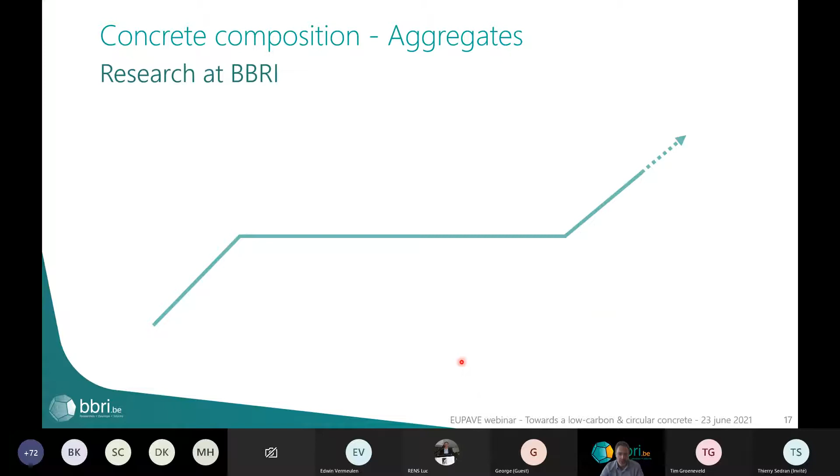Of course, you can always go further, and at the BBRI we have conducted research projects since the 1980s in which we are trying to push the boundaries of the application. When there was nothing allowed, we already made a building with recycled components and recycled concrete.

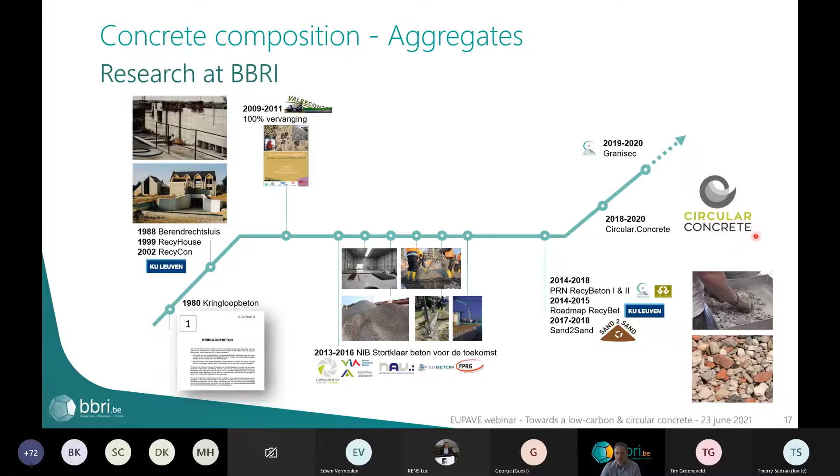I'm going to discuss some of them very briefly. So we looked at maximum replacement. The standard allows a certain replacement percentage of recycled concrete aggregates and also manufactured aggregates.

And we made some, but we really pushed the boundaries. We looked at 3 concrete compositions with recycled concrete aggregates, in which we replaced 90 to 100% of the natural aggregates by the recycled ones. We also looked at manufactured aggregates, mainly polluted sand that was cleaned, copper slag, and inox slag.

These are only available in sand fractions, very fine fractions, so here we replaced mainly the sand fraction in the concrete. We compared the results to a concrete composition with 100% natural aggregates.

To be clear, this was a very limited scale research. We only made 1 concrete composition of each type, so we did not conduct a variability study or such things. It's really to look at what are the possibilities and what can we expect when we push the boundaries.

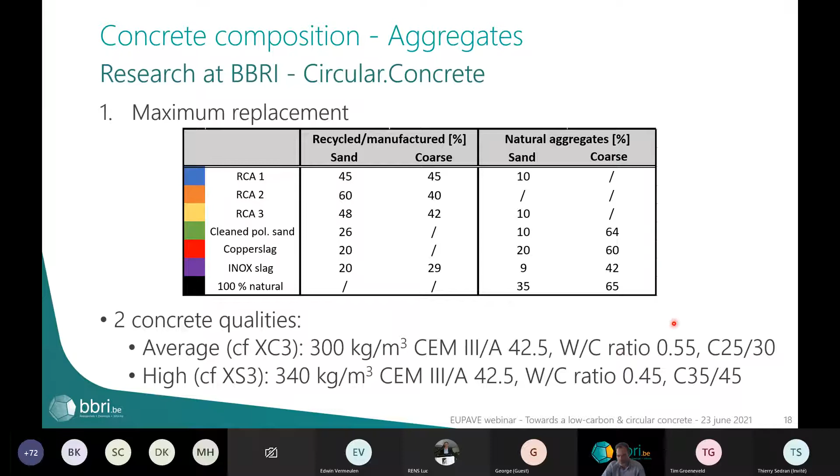We used CEM III/A 42.5 to make the concrete, and then we looked at a high quality concrete with 340 kilograms and a water to cement ratio of 0.45. And we made concrete with that.

Also very important is that we added the recycled concrete aggregates in oven-dried state, and then we added extra water to take into account the water absorption of these aggregates, which meant in fact that high amounts needed to be added.

To take into account the water absorption of the recycled aggregates, the value we used to calculate this was the water absorption after 24 hours, and we know that when we mix dry aggregates in concrete, they will not absorb 100% of their water absorption after 24 hours. So there is added water that is not going to be absorbed by the aggregates. And of course, we looked at the influence on the mechanical properties, mainly the compressive strength of concrete.

We saw that when we look at average quality concrete, the use of these aggregates in very high percentages did not lead to a significant negative influence after 28 days. After 91 days, the influence became much more clear, but after 28 days, which is still the time during which most evaluations are made, there was no or very limited negative influence.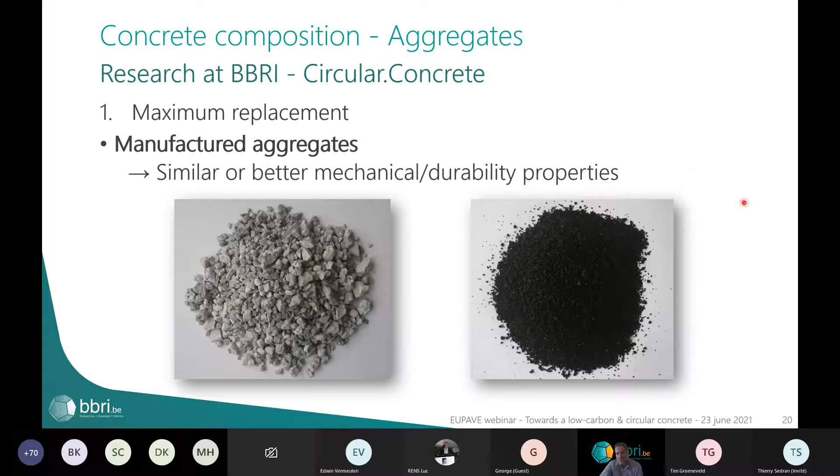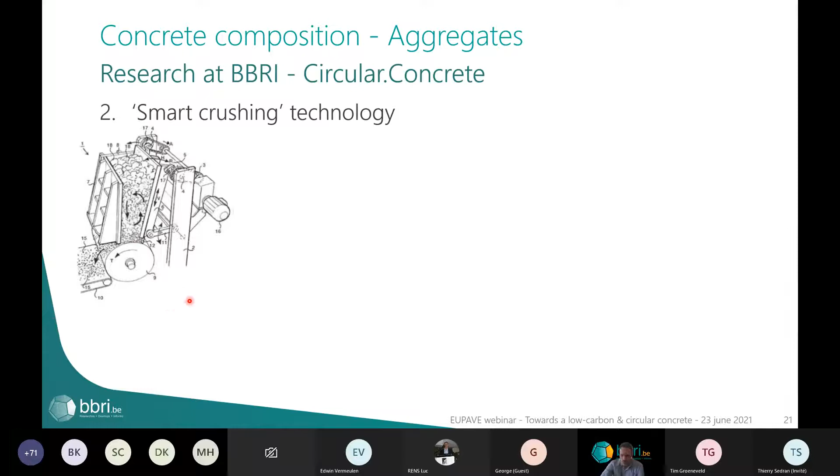We also looked at the smart crushing technology, in which special equipment is used not only to break but through a combination of different operations to get the debris of the concrete down to its original components—the original aggregates without any mortar still adhered, or very little mortar still attached, plus sand and a fine filler particle which can then be used in cement production or even as such in concrete production.

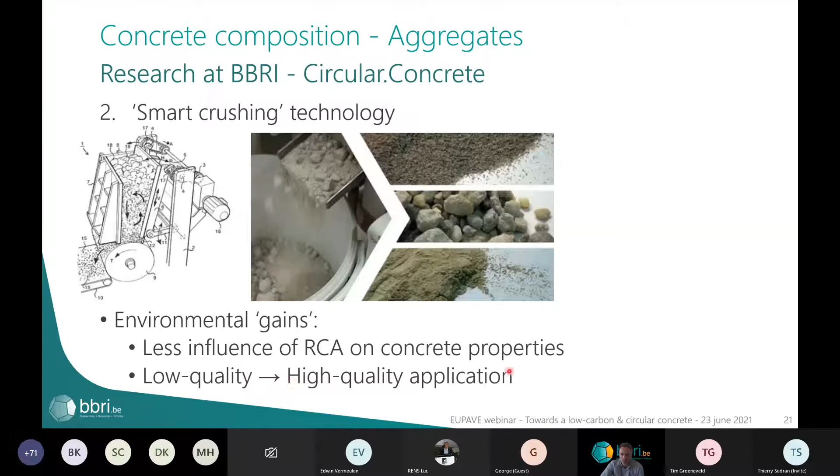So this is the theory. The environmental gains are, of course, that the negative influence on the concrete properties of the recycled concrete aggregates due to the attached mortar can be lessened—pushing perhaps a low quality batch of recycled aggregates to a high quality application, just to improve the properties of these aggregates.

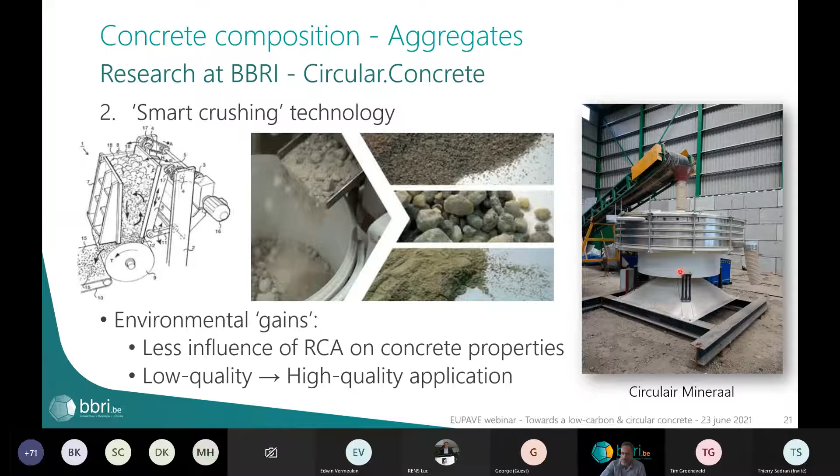So we did some experiments, and we went to Circulair Mineraal, a firm in the Netherlands which has such an installation to produce these kinds of aggregates.

What we did was send some debris, which we received from different producers in Belgium—you can see there are large debris fractions—to Circulair Mineraal, and they returned us a combination of all different fractions together, which we then sieved into the different fractions. We did this for four different origins of recycled concrete debris, and we saw that all the returned samples showed a very similar aggregate size distribution, and also a lot of fines.

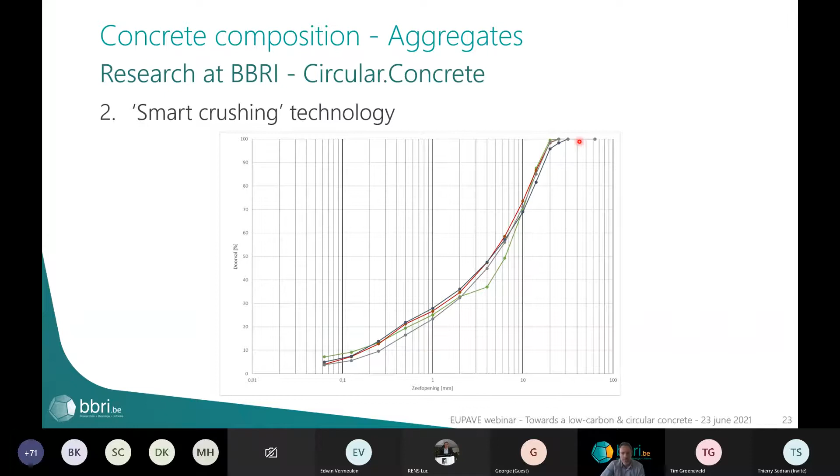What we did was look at the properties of the returned crushed recycled aggregates, and we saw that the water absorption and also the Micro-Deval—the mechanical resistance of these aggregates—were very similar to normal crushed recycled aggregates. So in fact, the smart crushing technology used here did not add a lot of value concerning the properties of the crushed recycled aggregates.

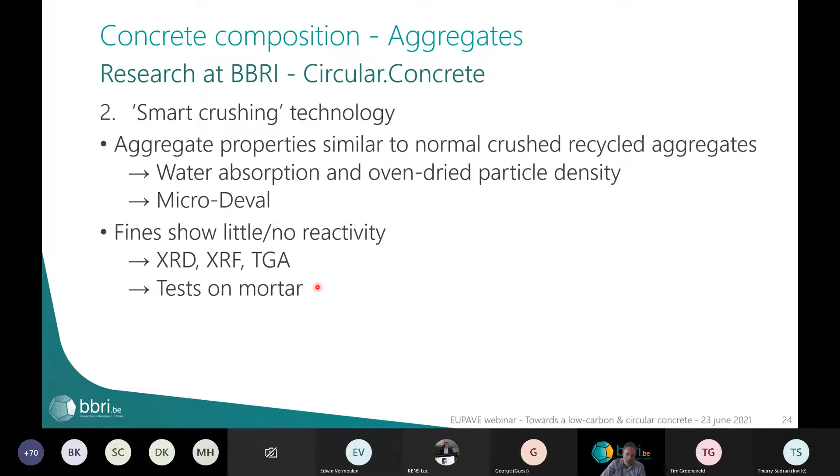We also looked at the fines, the powder fraction that we received. We looked at the reactivity as such, without any treatment or heat treatment. We just used it like this in mortar, and we did not see any contribution to the strength development of these fines. We also looked at it under different analyses—XRD, XRF, TGA—and it all concluded that there is little to no reactivity left in those fines.

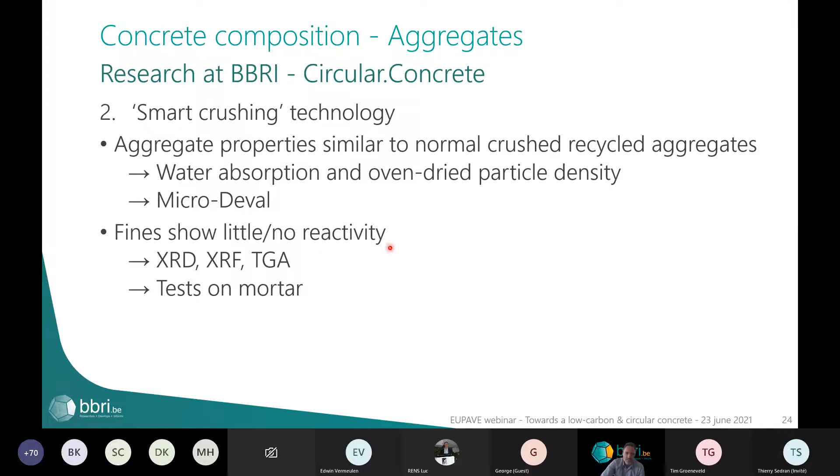So perhaps it has to do with the Belgian concrete. We use a lot of crushed limestone in our concrete in Belgium, whereas in the Netherlands a lot of rounded gravel is used in concrete.

I can see that the technology can be more effective on rounded particles than on angular particles. And we also have to look at the cost versus benefits.

What about the streams, the high quality streams that are already available? Is this technology useful to heighten the quality of those streams, or are the gains not enough to justify the higher costs of this treatment? So it seems a very interesting technology, but it has to be looked into if it's applicable on all types of recycled concrete.

And thirdly, I want to talk about the carbonation of recycled aggregates. The recycled aggregates contain a large portion of mortar, and this mortar can be carbonated just like ordinary concrete. In ordinary concrete, it's not good that it carbonates because it's not good for the rebar inside the concrete. But in fact, the concrete itself gains in strength and becomes less porous.

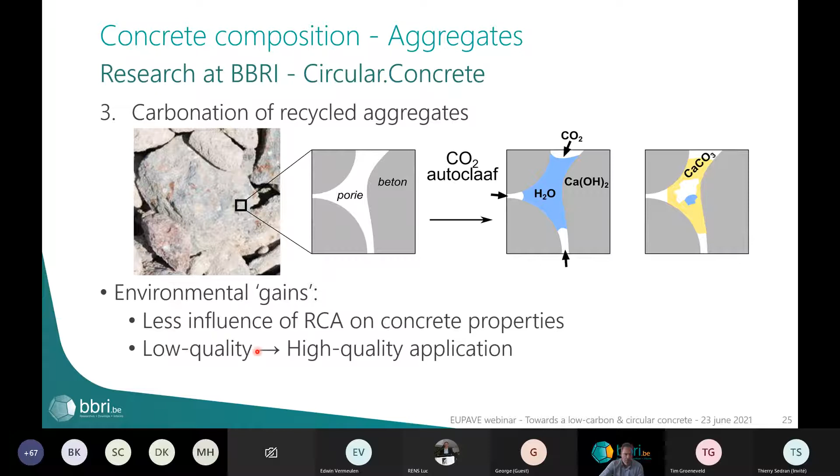So the gains here, the environmental gains that can be expected, is that the used recycled aggregates will have a lesser negative influence when we use them into concrete. The water absorption is lesser, so the water in the concrete can be managed more precisely. And perhaps we can push the low quality recycled aggregates that do not comply to the requirements from the standard.

Perhaps we can push them with these treatments to the high quality standards of the standard. Of course, it would be ideal that we can use the CO2 that is produced in the cement production. If we can use this CO2 to carbonate these aggregates, we can have an even higher environmental gain, but we are not there yet. At the moment, there is industrial CO2 that is used to produce this carbonation.

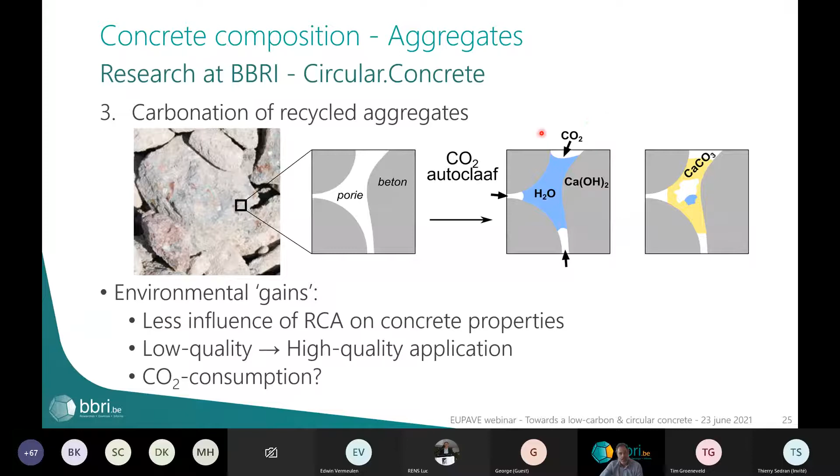So we did these experiments. We used an autoclave in which a very high percentage, 100% of CO2, was injected into the aggregates at high pressure, and we looked at the differences. We could see that it has a positive influence on the treatments. We looked at the water absorption and the particle density of the aggregates, and they showed improvements. But it was very limited.

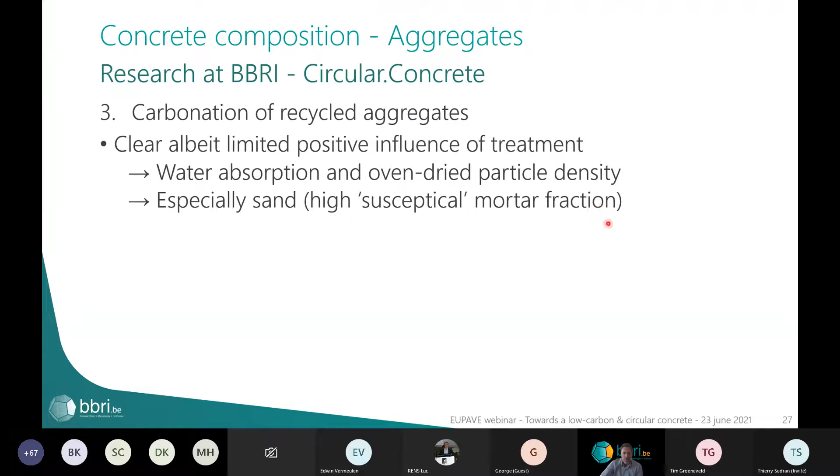The highest positive influence could be seen in the sand fraction, and this is very normal. This is logical because the sand, in fact, consists mainly of mortar, so it can be carbonated at a higher rate than the coarse aggregates. However, no clear influence could be seen on the mechanical properties of these aggregates, and perhaps this has to do with the intensity of the test method.

So the slight enhancement in porosity and density perhaps doesn't have a very high influence on these properties. So it seems interesting, but again, we have to look at the practical application of this.

How can we, in practice, begin to carbonate these aggregates? What about the CO2 capture, to use the outputs of cement production in this application? And again, what are the gains versus the costs? Because there already exist high quality concrete aggregate streams in Belgium anyway. So perhaps this is not the miraculous solution to help this aspect.

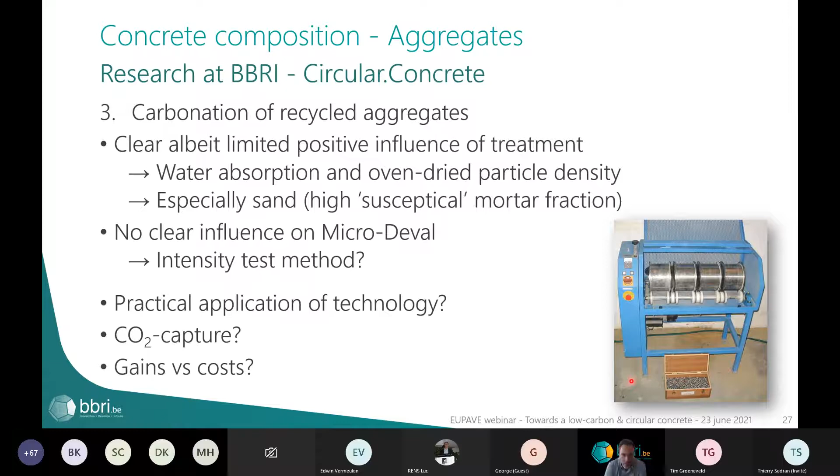So this is what I wanted to say. I don't know if there are questions.

Thank you very much, Bram, for this nice presentation. I've learned that the standards are severe, but that with your project Circular Concrete, at least you made a step forward in pushing the boundaries.